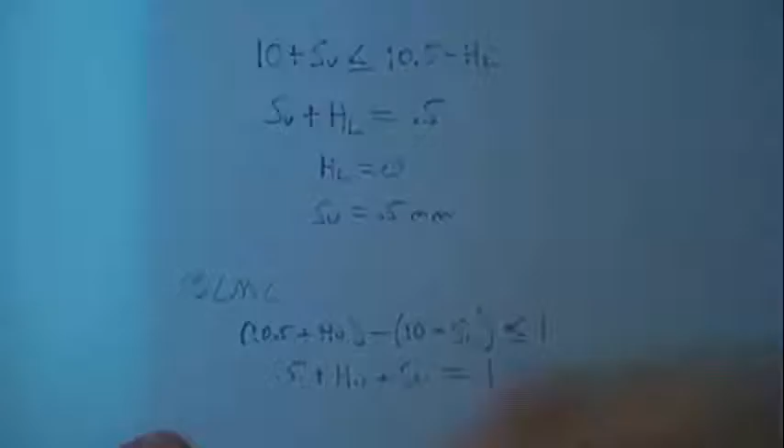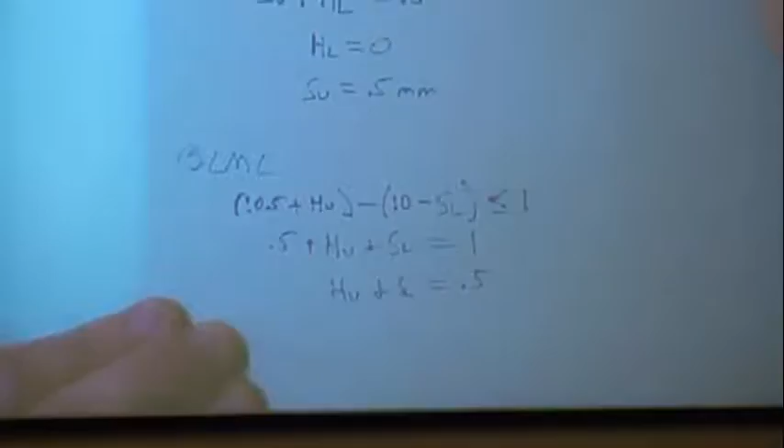1, so I know HU and SL would be equal to 0.5. In this case, I'm not really concerned with how difficult it is to manufacture. I know I need to leave some amount of tolerance on my hole. I can't give it a 0 on both sides, so I'll just set them both to 0.25. And I know that I can get away with that in my design.

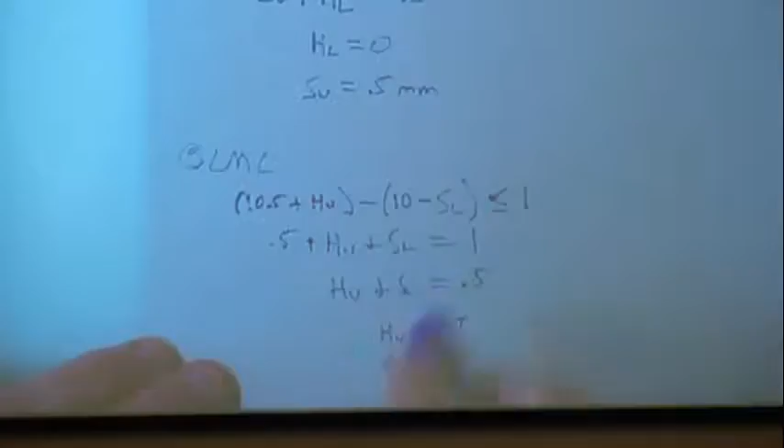So this is a bit where you can see the difference between your straight math class where you're solving for the one solution that would work and an engineering case where you're using some of your intuition, some of your judgment and your experience, or some really good analysis if you don't have that experience to figure out what will work in your situation. And keep everything on the plate here. Does everybody follow that? Okay, good.

I know it's not the most fascinating topic again, but it's a very useful skill to have, even in some of your assemblies. So I think about, like on the ISBVI team, on the Braille e-reader, you have a lot of pieces that are going together. You're mass producing a lot of small pieces to make one device, right? And you want to know for sure that as you assemble those, each of them work correctly. This is the way to do that analysis and figure out how this would be.

So like I said, this is a very simple geometric way of doing this. There are a lot of different solutions that would have satisfied these equations, but I'm going to use some judgment to get there. You can do statistical processing. So if you're going to make 100 million parts, you may be willing to accept that there's a possibility of some of them not working, but the probability is really low, and I can open my tolerance to accept more parts if I have a low probability. Okay? So there are some more complicated ways to go about doing this, but this is kind of a basic, straightforward, no-nonsense way. Everybody follow that?

Okay, except for that guy right there. He didn't follow it.

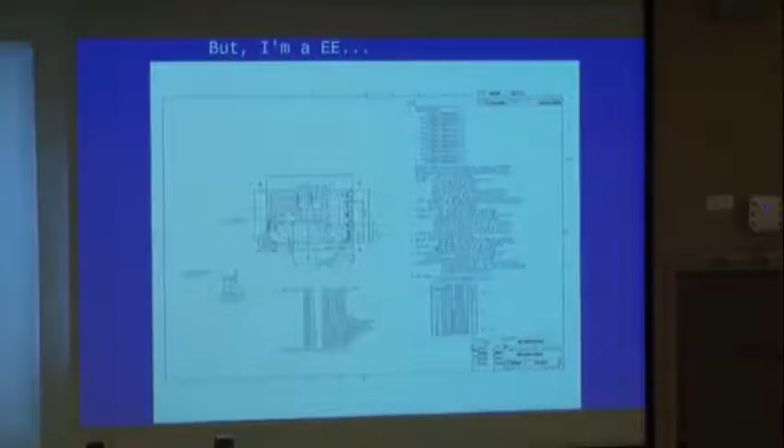Okay. So you say, but I'm an electrical engineer. I don't do anything like that. Well, you do, right? So if you're an electrical engineer, you create PCB schematics, things like that, you're going to end up with a very similarly looking part. You're going to have a layout. It may have dimensions on it. So this would be fabrication of a PCB for a production, a big manufacturing level design. So this isn't specific just to MEs. It's definitely applicable to most branches of engineering.

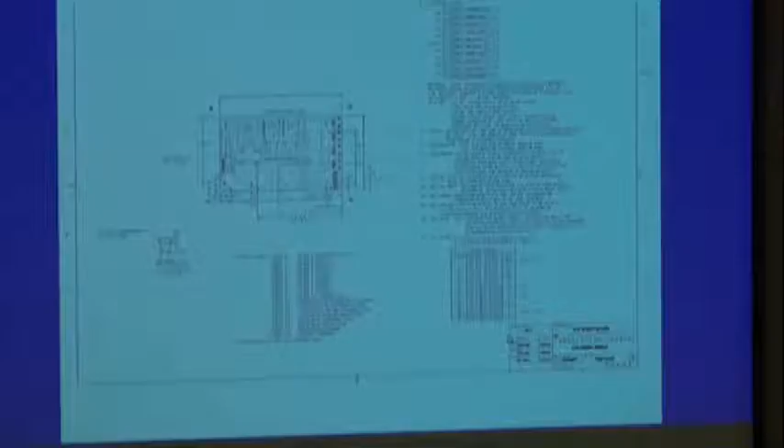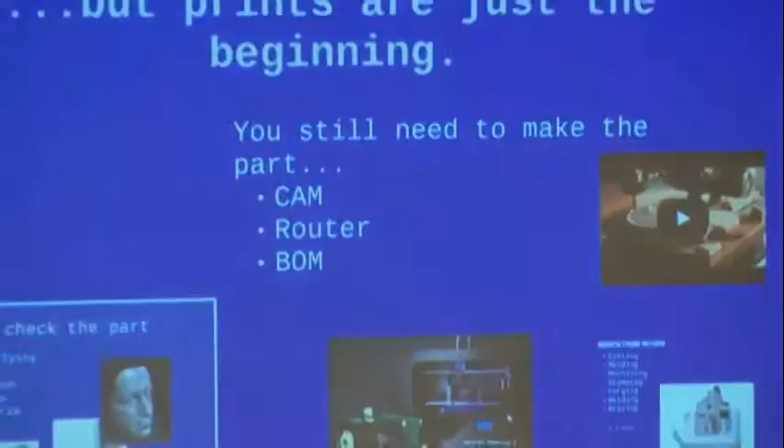But prints are really just the beginning, okay? There's still a lot more to do from the point where you've specified a print, all right? That's not the end of production. That's the beginning, right? So the next thing would be to make the part, and there are a lot of ways of doing that. Starting with creating your CAM model, right? So you went through, you did your design in CAD, you created a print, now you need to go and build your CAM. That manufacturing router that we talked about.

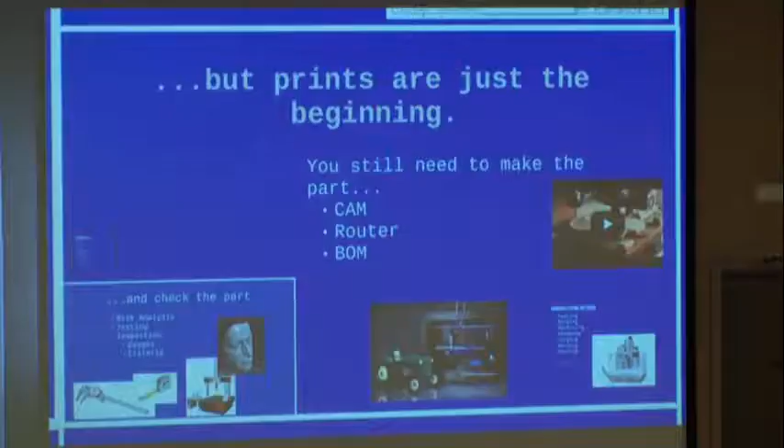So you may have a machine CAM for making one particular piece of the part, but there may be several steps to making that part. So you need the router and then the bill of materials. So a lot of different things there. One common problem with undergraduates who do design work and build prototypes is they think everything is made in one of these. And that's not the case in industry. Okay. So how many of you own products that were made by a 3D printer that you didn't make yourself? Yeah, one?

Okay. How many have something on them right now that was 3D printed? One? Two? A couple, right? How many of those are your prototypes for EPICS? All of you? Yeah, okay. So it's very uncommon to get production parts from a 3D printer, right? It's starting to be more common, but this is not how most things are made.

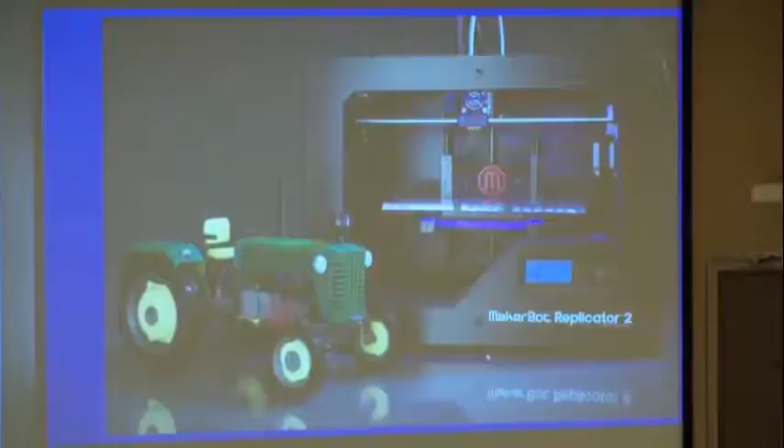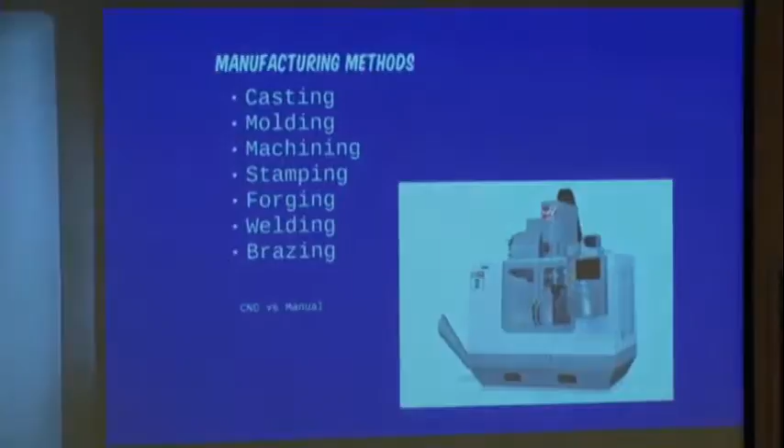So you need to learn to think beyond the simplest way to make the part and think about how you are going to make more of these. This is a more common way to do that, all right? So this is a mill. And there are a number of different ways to make physical things, right? There are things like casting, which is a way of forming metal by putting it into a mold or a shape, okay? There's molding, which is very similar, but usually for plastic, right? So you're going to do an injection mold like the Legos we saw at the beginning, okay?

There's machining, so that's a subtractive way of making things. So with a mill like this one, you're going to take a tool and you're going to cut material out. There's stamping. This is how a lot of the shells of a car are made, right? So you want to get that shape, or how they used to be made back when they were metal. There are things like forging. So forging is basically smashing hot metal into a shape. The traditional way of thinking of that is the anvil and forge. That's not really the way it's done these days. It's a lot more elegant than that.

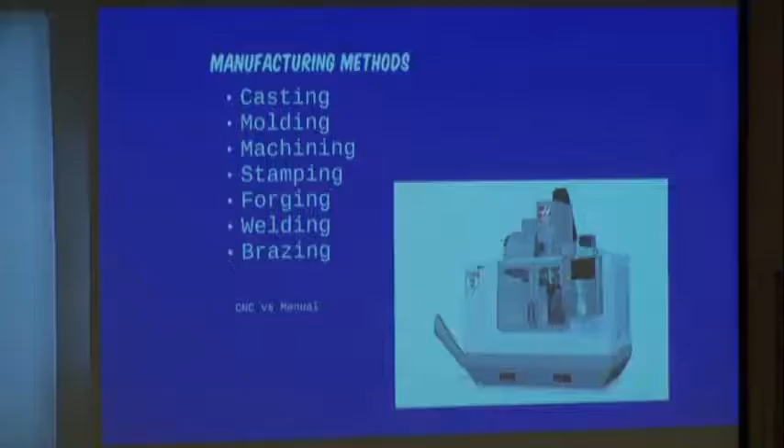And then there are some joining things like welding or brazing. This is where you're getting things hot and attaching them together. You could do epoxy. There are a lot of different ways to make parts, okay? There's no way we could cover even close to what all of these things are in any detail here, but be aware there are mass production level ways to make a lot of parts.

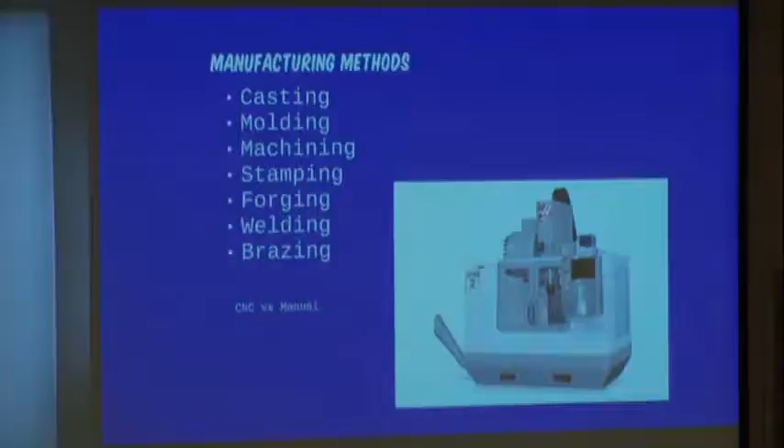So I'll show you a quick example of a really nice CNC operation just because I think this one's kind of cool. Or no, I won't. Perfect. You can make a guitar. It's cool.

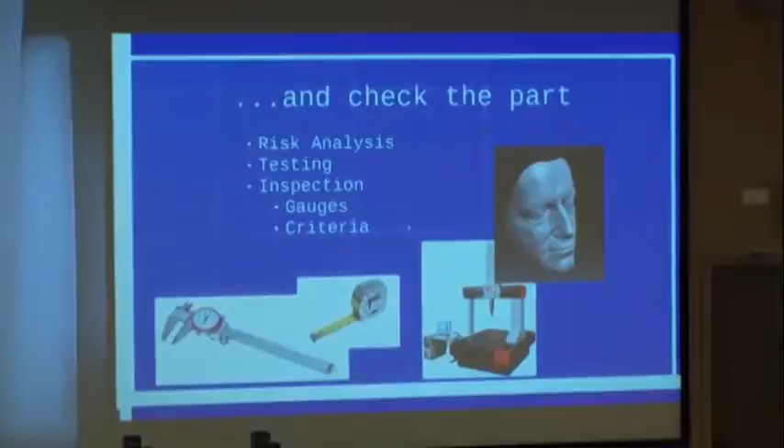And then finally, after you've made the part, you need to check the part, right? So you've had someone make these parts. You need to verify that they're all correct. You'll start with your risk analysis. This is something that you all should be doing. It should be done toward the beginning of a project, not toward the end, contrary to popular belief. And then you would update it as you go through the project, okay? So you're going to go out front and look for how could my product go wrong? What are the things that could happen along the way? And try and mitigate those early rather than waiting till the end to check.

The other side of that is testing. So as you've done risk analysis up front early on, you're going to identify what are the things I need to do to verify and validate that my design works. Okay? Verification is checking that you've met your specifications we talked about at the beginning. Validation is checking to make sure you met your user needs. So I could verify that this table can support 300 pounds by putting a weight on it and doing a test. And then I could validate that it works for working on a car by setting a car on it and working on the car, right? So that would be use versus sort of a function test, right?

So if you're in software, you could think about verification as a unit test of one function in your software, whereas validation would be sitting the user down and having them go through and use it and make sure that it really works.

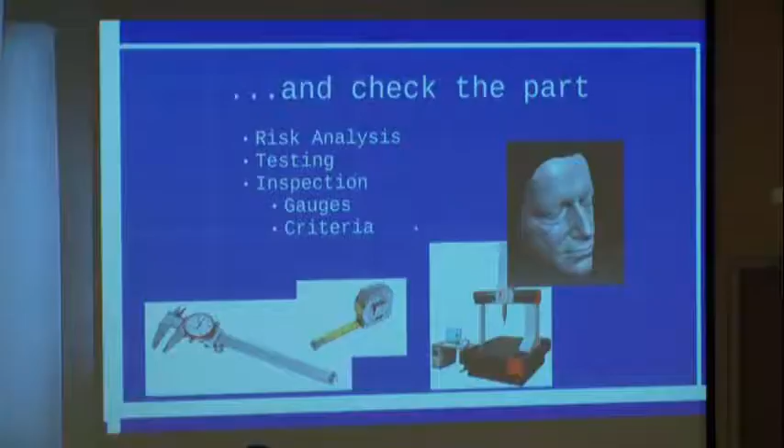Inspection happens in a lot of different ways. You can have simple tools like these, a measuring tape or a caliper, and that all depends on what tolerances you set, okay? If you set your tolerance at, say, 1/16 of an inch or greater, you use a tape measure, no problem. If you have a smaller tolerance, say in the thousandths of an inch, right, or tenths of a millimeter, you would want to use a caliper like this or an even smaller micrometer.

Or if you want to get into something that has more detail, you could use something like this. So this is a CMM. It takes basically dot points all over a surface, and it can generate a very fine point cloud, so you can look at a complex shape.

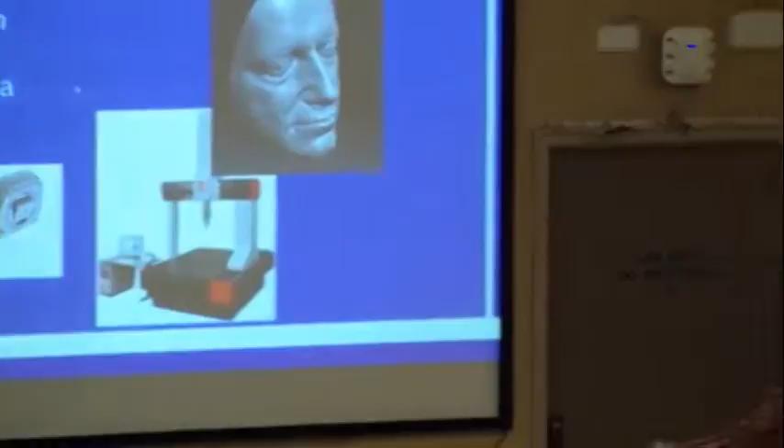Or you could do some of this 3D surface scanning like this. So there are commercial things like white light scanners that create a surface like this. You can check that against an original model to see how far you've drifted from a surface that you intended. Okay, so you can get into some very detailed ways of checking parts.

Another good way to check parts is by using gauges. So that's where you create basically a functional mate that has all of those tightest tolerance requirements you have and checking to make sure that your part will function with that.

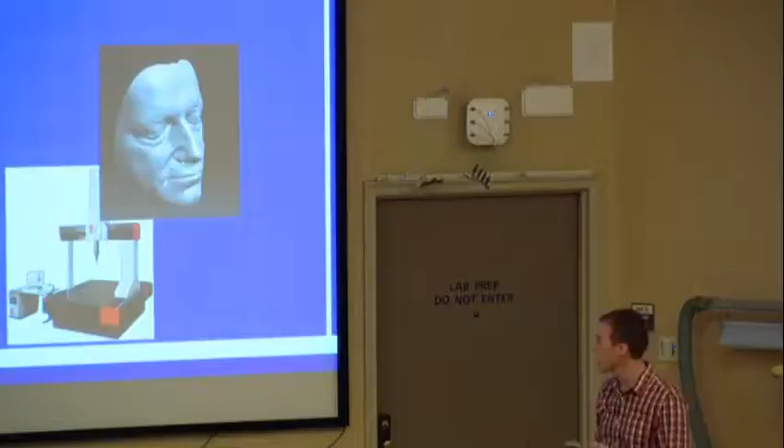So within all of this, there are a lot of different engineering roles, and I alluded to this at the beginning. So not all of you are engineers, but a lot of you are. So we all think of the design engineers, and all the things we talked about, really your responsibility is to get to prints, okay? So all of those design activities you do, especially if you're in the mechanical field, so if you're writing code, this is a little bit different.

But if you're making a mechanical thing, a physical thing, all of your effort, all of that human-centered design process you did, going out building empathy, meeting with customers, iterating through conceptual design, culminates in a boring print, okay? A piece of paper with drawings on it and dimensions, numbers, okay?

But that's how you control the creation of something amazing that you did through this whole design cycle. So while it's a boring thing in practice, it's an amazing thing what it can do for you by taking all that work that you did and producing something physical and real, okay?

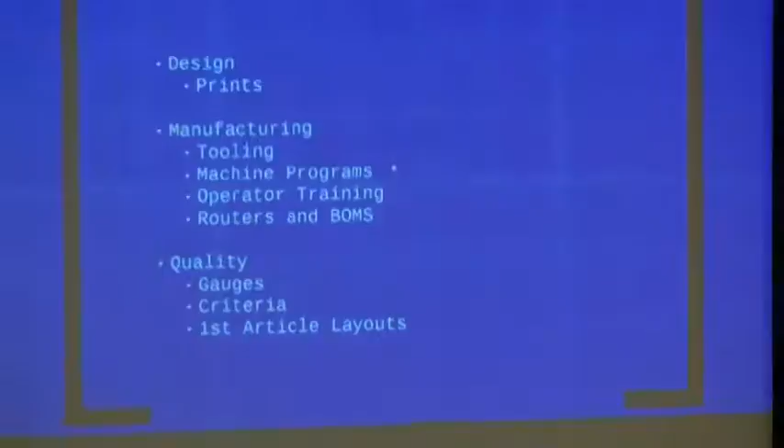If you're a manufacturing engineer, which a lot more of you will end up being than you think, you'll do things like figuring out the tooling for making the part. You'll figure out the machine programs for creating those things. You'll create operator training. That's sexy, right? Teach people how to do something. But that's how you get a part made the right way so that you can get it out in the field. You might be creating those routers and bills of material.

And then there are quality engineers, and they're the ones that are responsible for helping you check parts. So they'll design those gauges. They'll help you come up with criteria for your part to say, what is it that you're analyzing in your part? What are the really important dimensions and which ones aren't as important so that you can make that part in a cost-effective way, okay?

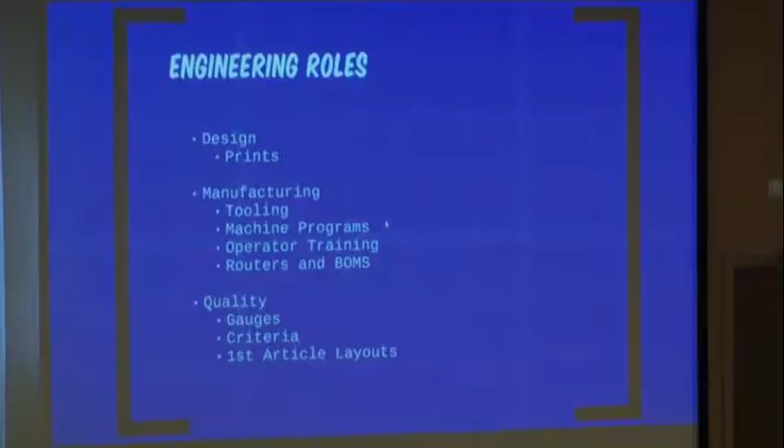Because there's usually a lot of different ways to manufacture a particular feature in a part. Some of them are expensive and some are cheap. The expensive ones usually give you really tight tolerances. The cheap ones usually give you really broad ones. So you have to figure out what do you really need.

They'll help with things like a first article layout. So this is where you do a first manufacturing run, and you check every detail of those parts and make sure that they're what you want before you ramp up into a full production. Okay? So again, this is just kind of a big survey level of what you might encounter in industry as an engineer.

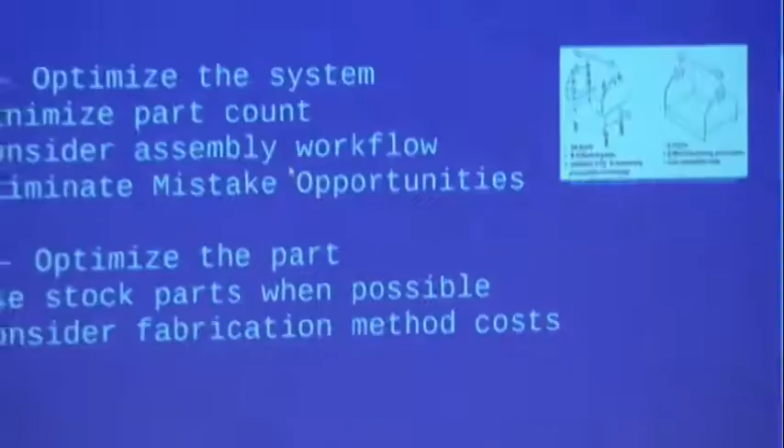I'm going to skip most of this part just to save you time, but some things to be aware of. Design for assembly is designing so that the part can be put together in the simplest way possible. Okay? So you may try and minimize your part count. You try and make interfaces so that you can't mess them up, right?

So if you think about, you have a part where you could insert one side or the other side, and it'll go into your assembly either way, but one is right and one is wrong. Better to design that so you can only put it in the right way. Okay? Some of those types of things, you try and eliminate those mistake opportunities. So another good example of that is if you're doing an assembly that uses a bunch of bolts.

If you can use all the same size bolt, then the assembly person just grabs a bolt and puts it in. If you use a bunch of different sizes, they have to sort through them, pick out the right one, more opportunity for error, right? So that's design for assembly. Design for manufacture is when you actually optimize the part itself. So you're trying to design the part to be easy to make, all right?

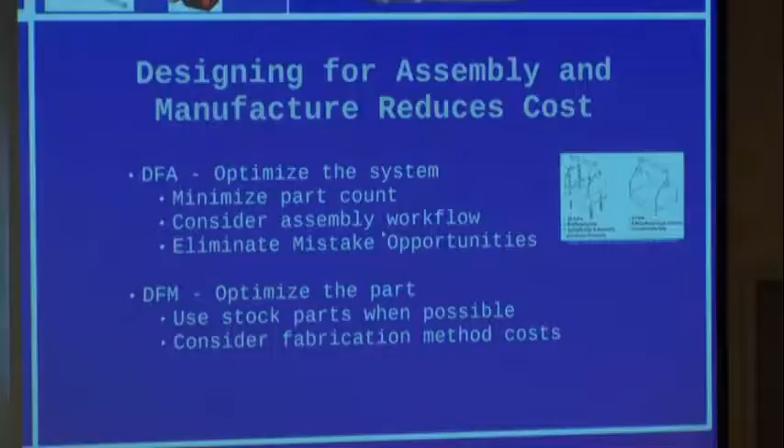So a great example of all of this would be this little design here. This one comes from Georgia Tech. So an engineer originally designed this little toolbox with two separate sides that are held together with a nut and a washer and a lock washer and the handle. So they had 24 parts that went into this thing, 8 different types of parts, a lot of different procedures to get this made for a very simple geometry.

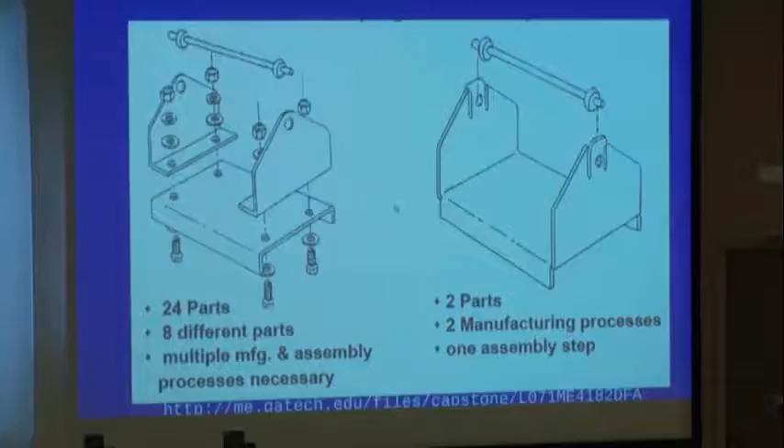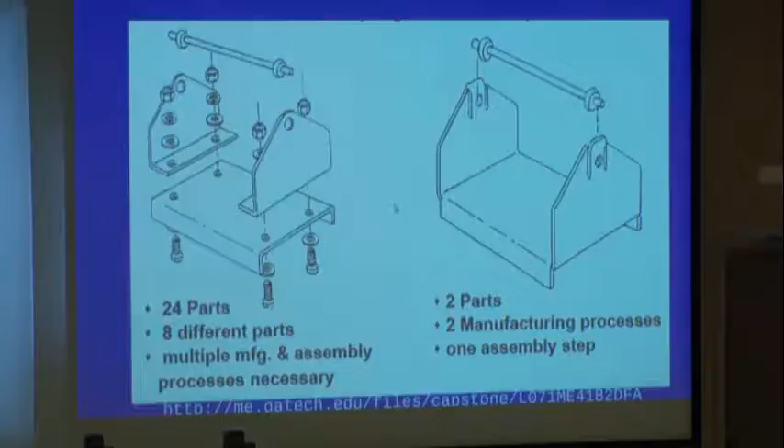Much better design was the second one, where you created the whole thing in one bending process and then you just snap the handle in, right? So you can imagine the amount of time it takes you to assemble that piece versus that piece. The amount of mistake opportunities there are here versus there. So as you get through, you've thought about how this should work for your user. You want to dig a little bit deeper into your design to say, how can I make it so that we can fabricate this thing easily and cost effectively?

So on a similar note, costs in design. So this is the little bit I'll give you about costs. As you go through the design process, you start out with a problem. You could have an infinite solution space, right? There's a lot of different ways you could solve the problem. The costs are really undefined at that point. What's going to cost you in the end? But as you start to get into the conceptual design phase, you've accounted for most of the cost of this.

So if you get through your design, you figured out your solution, and you go to your manufacturing people and you say, now let's figure out how to do this in a cost-effective way, it's too late, right? Those costs have already been specified by the design choices you made all along the way. So you really want to think about those things up front.

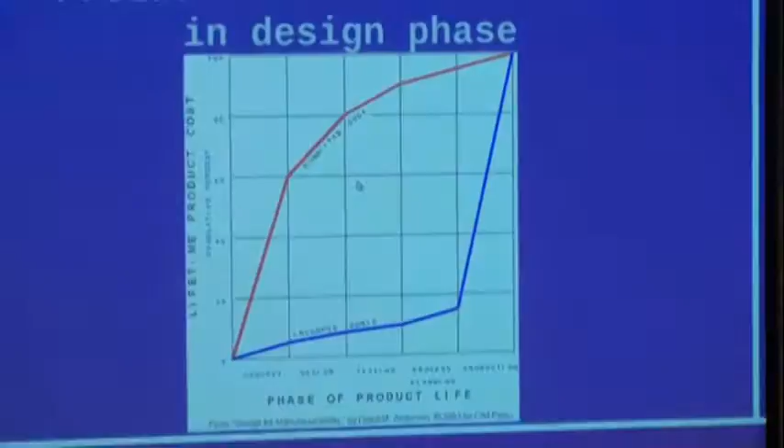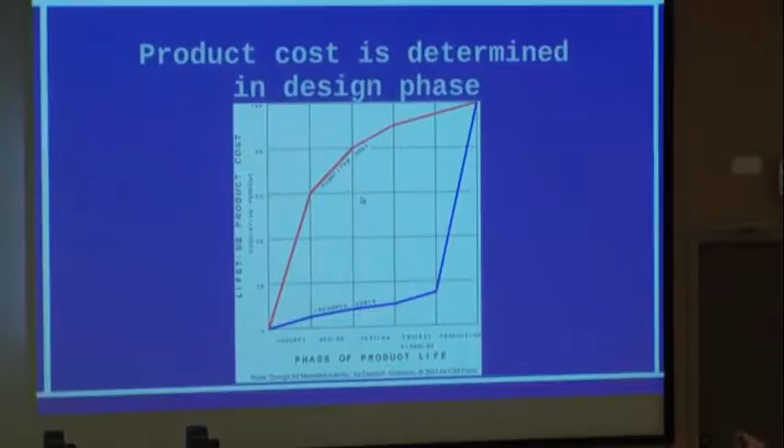Okay? Everybody follow that? So work with your broader group. And that's why most of your teams are multidisciplinary. We try and get you different viewpoints so that you can help understand all of these things early on in the process rather than getting stuck at the end. Okay?

So I will let you skip the exercise because we're about out of time anyway, but if you're really interested in doing tolerance analysis, I'd be happy to help you one-on-one. I won't make all of you suffer through doing tolerance stack-up homework, although it would be helpful for you to do it. Okay?